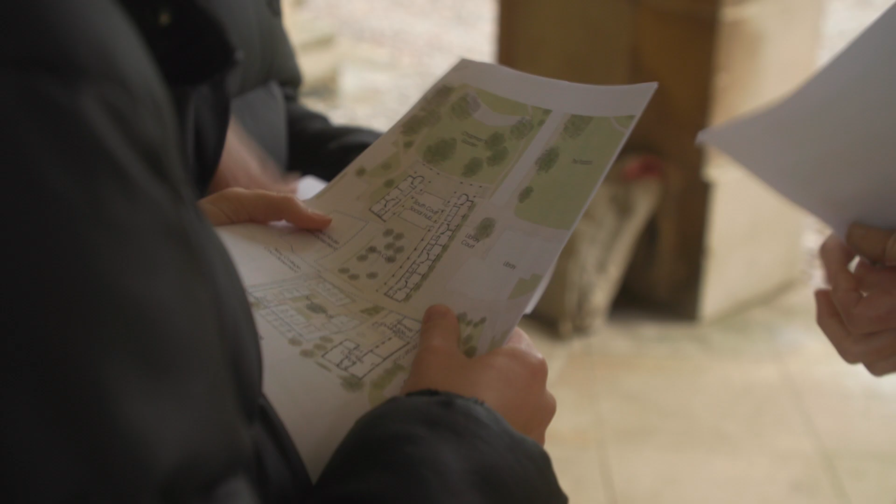First and foremost, the new development is really about people and about the community that exists here, and the way the spaces and buildings support that community.

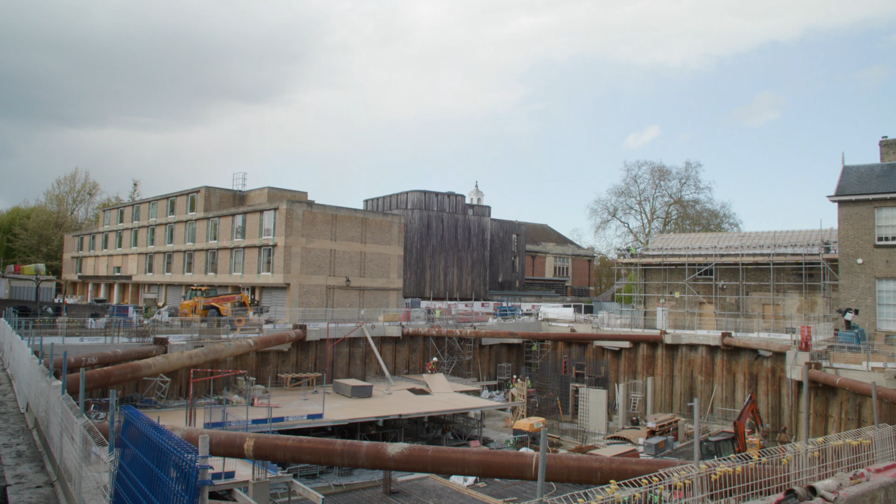We've been planning for the project for the best part of a decade, and we see it as a once-in-a-generation opportunity to encourage the different parts of the community to meet and interact. It's about interaction, sociability, and the life of the college and the way that supports the intellectual life here.

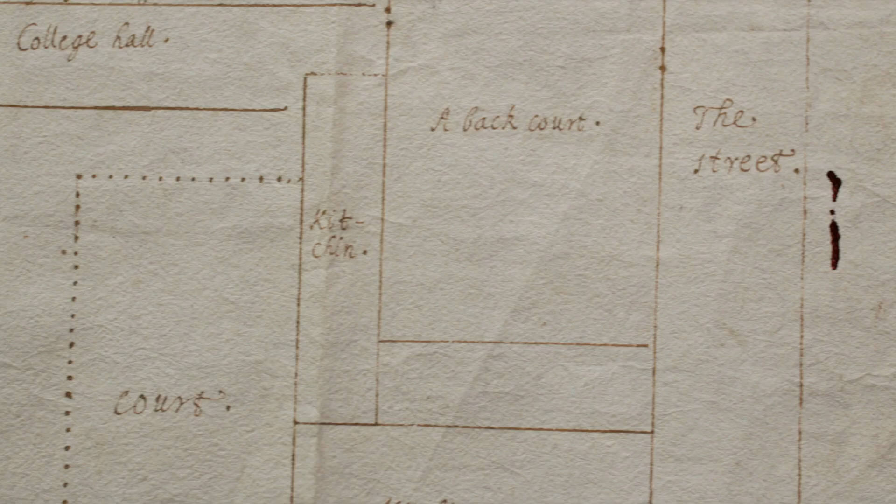The college has been here for over 400 years, and before that there was a priory. So we're very much aware of the new development as another layer in this progressive transformation of the site.

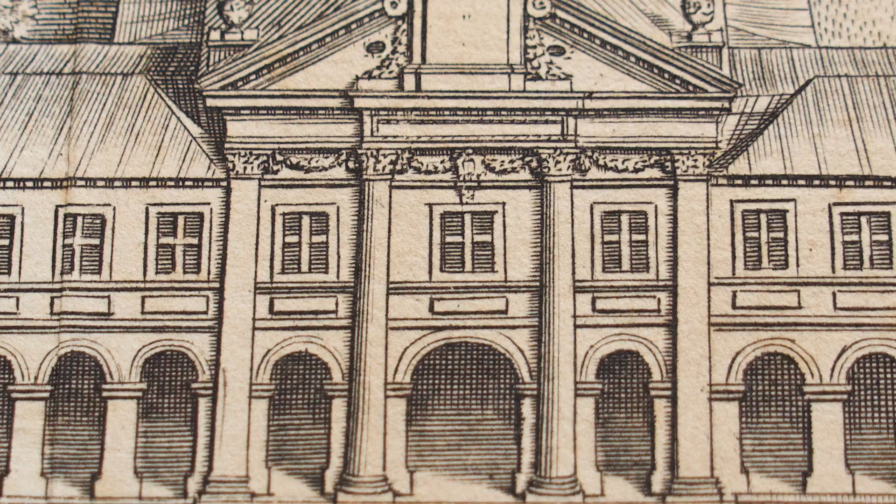Respecting the character of what's here and how that's evolved over time, we spent a lot of time understanding the character of the existing college spaces and the way they're interconnected. There's a unique sequence of informal and formal courts and gardens, so what we've been doing is looking at how the new scheme can knit into that existing network of spaces and routes.

We're looking at the proportions of existing buildings, the materials, the touch and feel of what they're made of, and the craftsmanship of the materials.

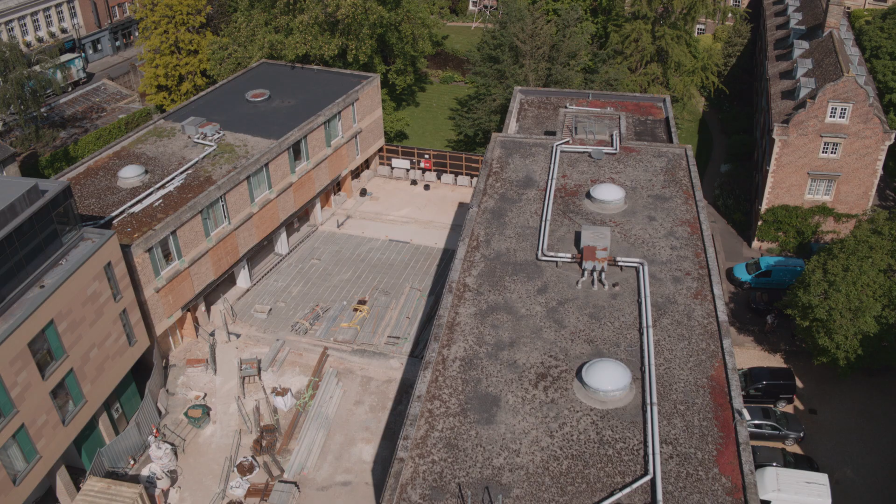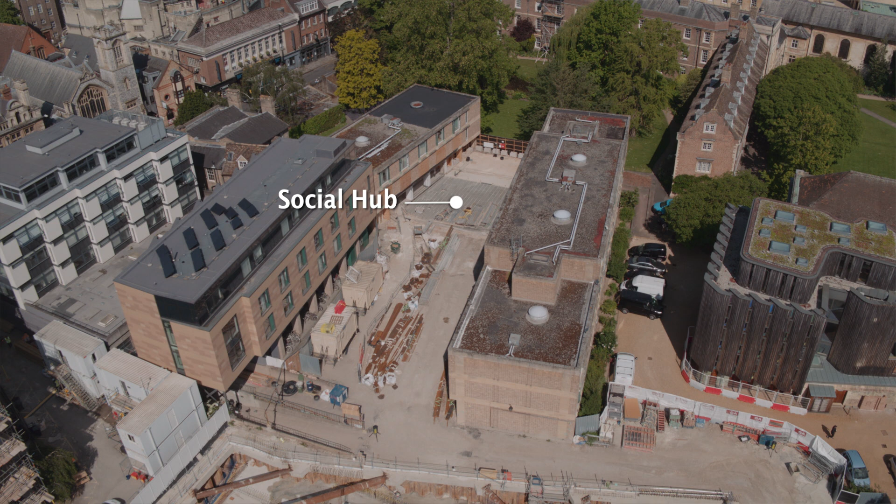The new development embraces the whole area from South Court through to Park Terrace and includes a new social hub, which is a cafe-type environment, and a new college court at the heart of the development, which provides 50 new ensuite rooms for students and fellow accommodation.

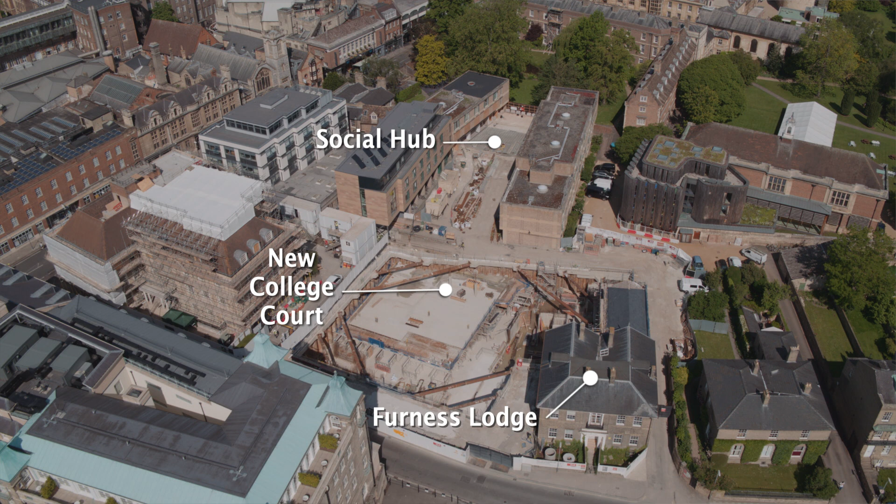Then, on the Park Terrace frontage is Furness Lodge, the 19th century villa. That has a new MCR, new teaching spaces and seminar spaces, and behind that will be the new college bar and event space, so new social facilities.

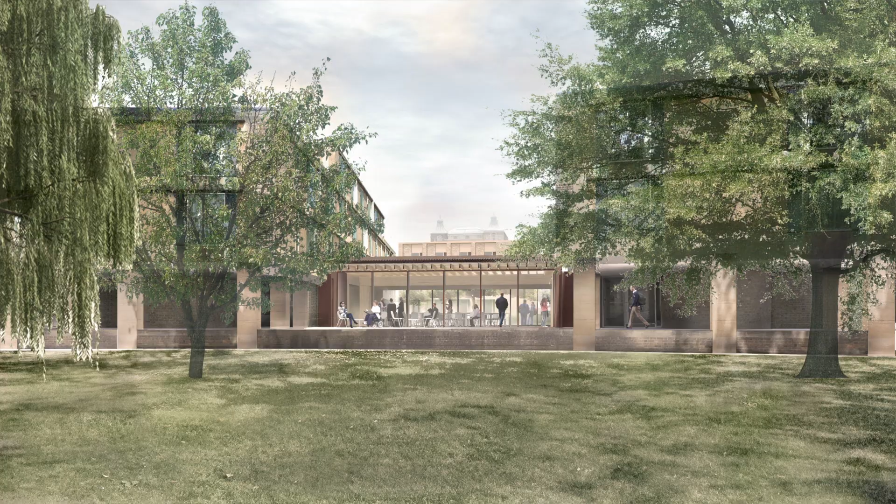Moving from Front Court through to Chapman's Gardens, the first thing you'll see is the new social hub, which sits in South Court in the location which used to be the college bar.

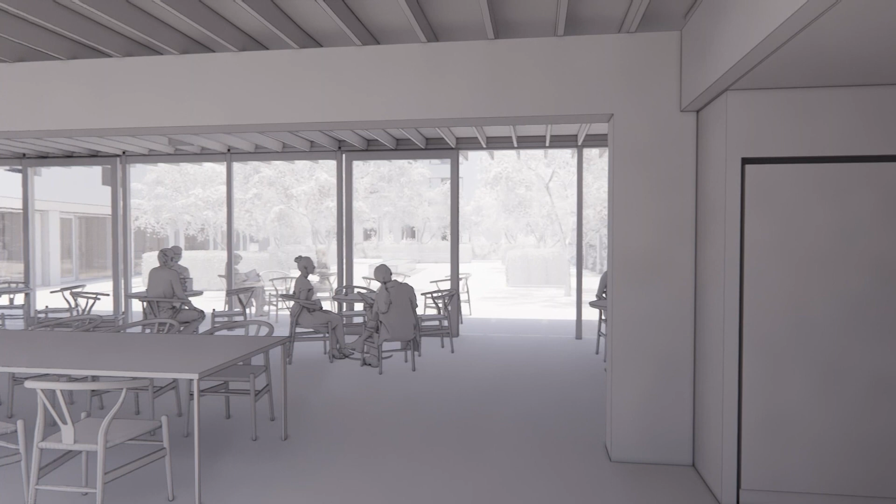The hub will be a beautiful, light, open area, a space for people to do informal study or to have supervisions or to meet friends. We've never had a space where people can mix throughout the day. We've lacked that sort of flexible, non-hierarchical space, and particularly a space that postdocs and researchers can use, because they're part of the community we haven't been able to offer much to in the past.

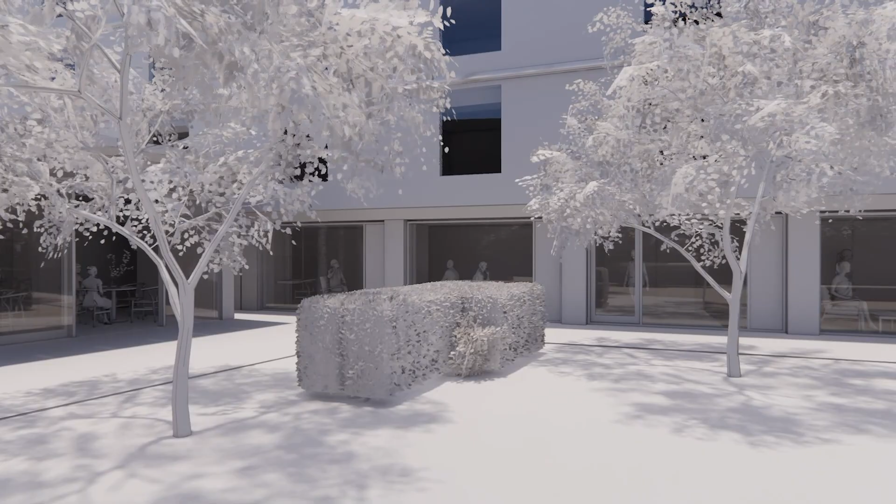The new social hub is going to be fully glazed to Chapman's Gardens and the new landscape in South Court. We're planting pleached plane trees, which create a canopy and a sense of quite intimate scale to that space, and there'll be a reflecting pool of water.

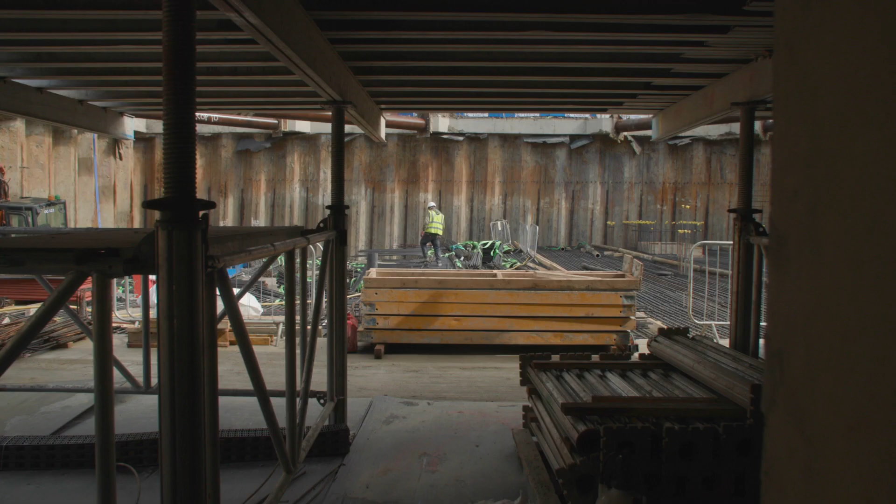We started work on site in November last year, so we've been on site now for about 6 months, and following the exam period this year you'll see a lot more progress as the buildings move forward.

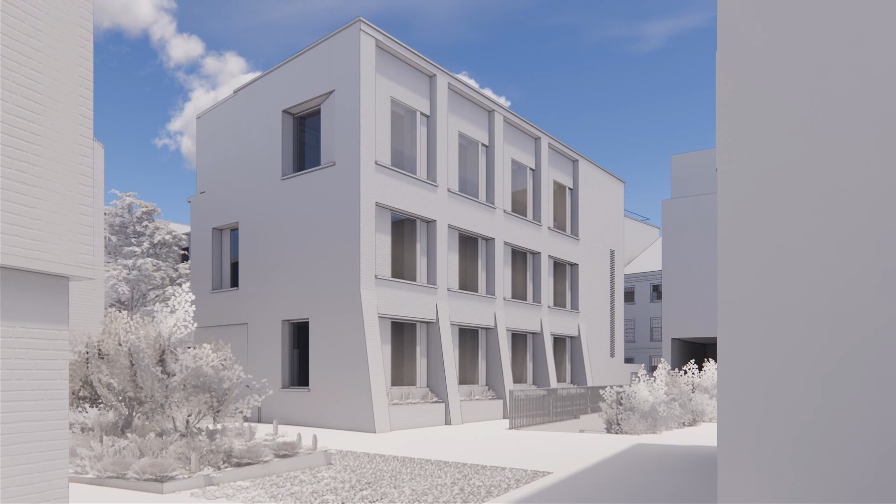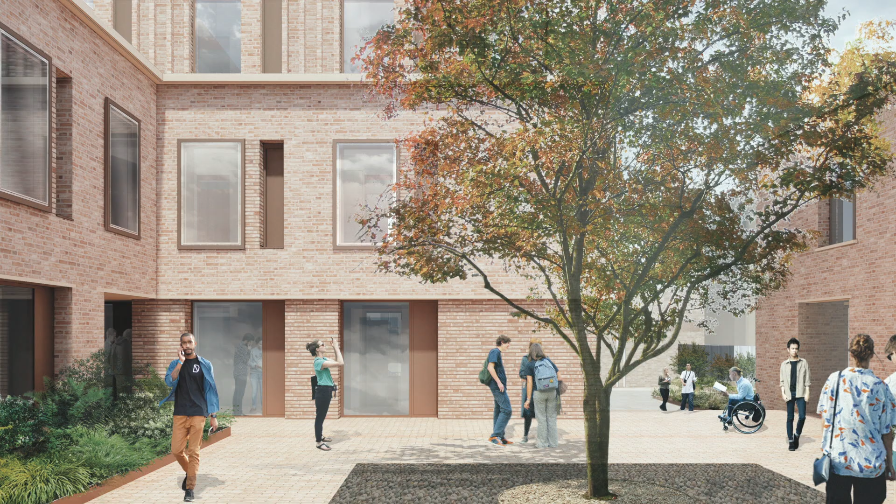The main residential part of the site is based around a new college court, and there are a series of 50 new ensuite rooms with also new accessible rooms, which is very important for the college, and a new accessible fellows suite, and all of those are designed around staircases in the traditional way with their own gyp rooms.

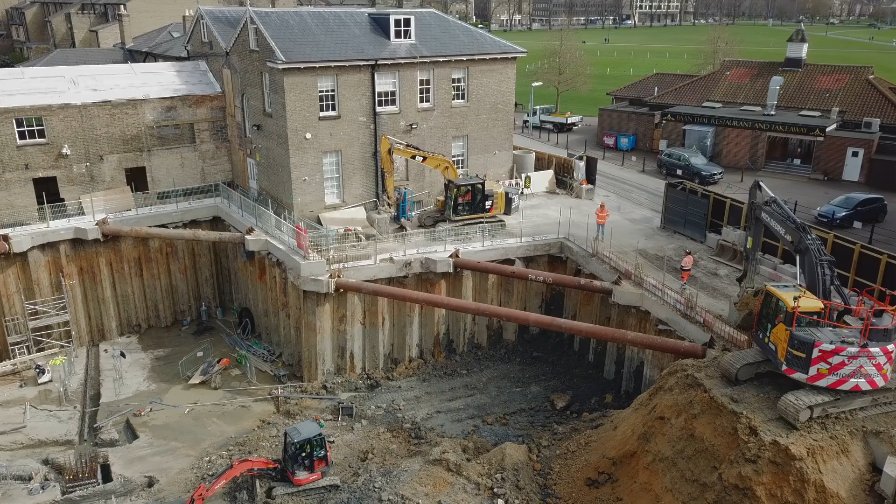The front of Furness Lodge will provide a new MCR. It will be a more flexible space, giving the graduate community new facilities. There will also be seminar rooms, supervision rooms, and an ECSU office. Front of Furness Lodge will provide us with lots of things we desperately have needed for a long time.

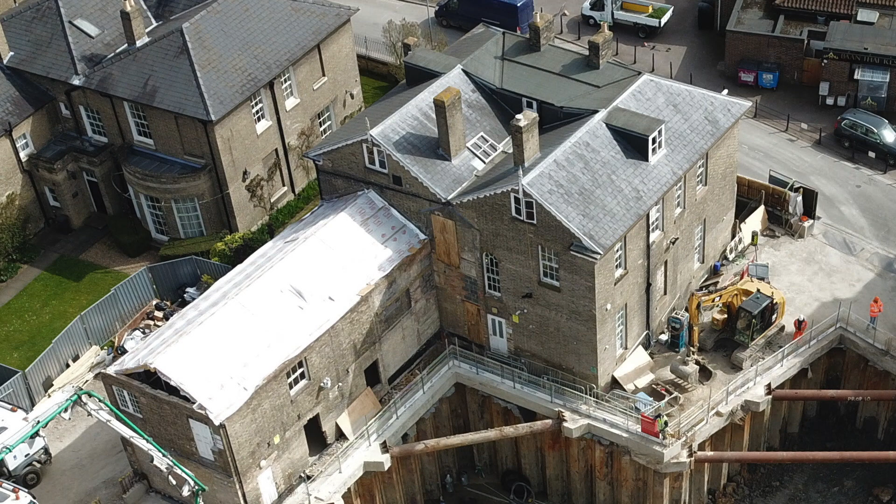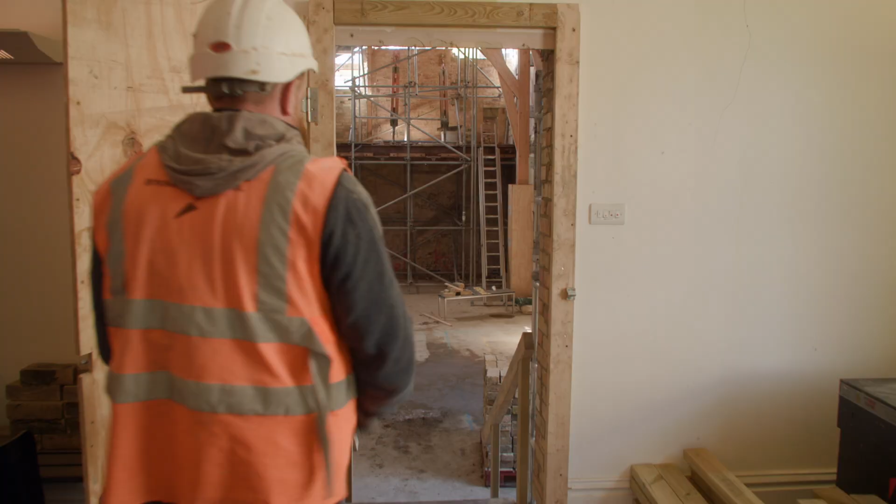And then behind Furness Lodge, in what was the service wing, we're providing a new college bar, which is actually going to be a very characterful space. It's a double height space open to the roof, something of a barn-like volume.

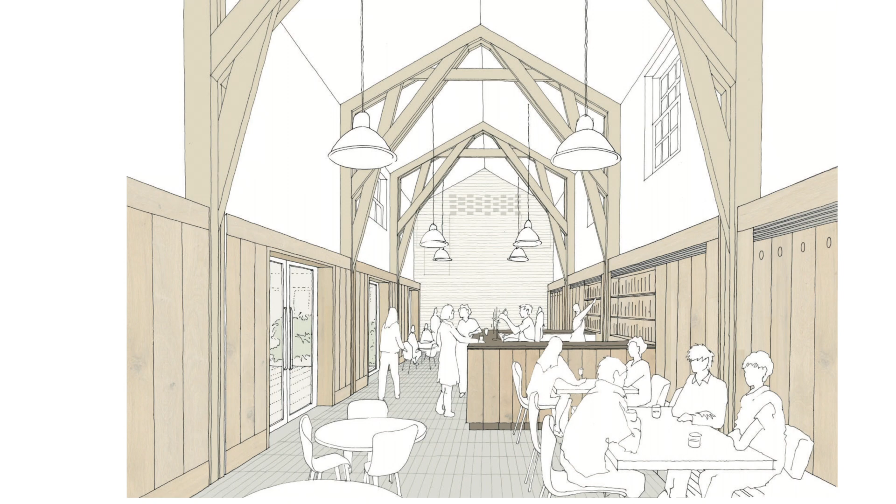Part of a series of social spaces we're creating, which you could imagine a bit more like a traditional pub that has a number of different rooms and bars with different characters. So we have a principal college bar, but we also have a separate lounge bar, and we're creating a large new event space.

Sustainability has been key throughout. We set that as an absolutely core target for the architects, and all of the engineers have worked on the project. It will be a very green development.

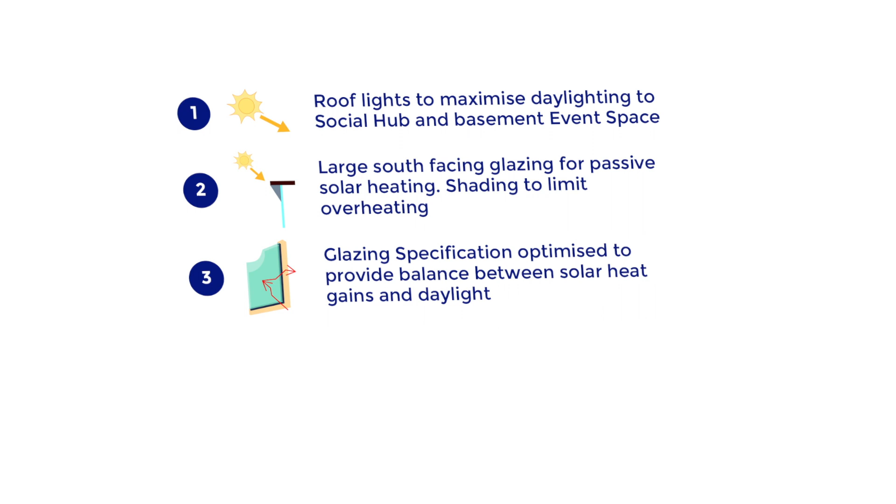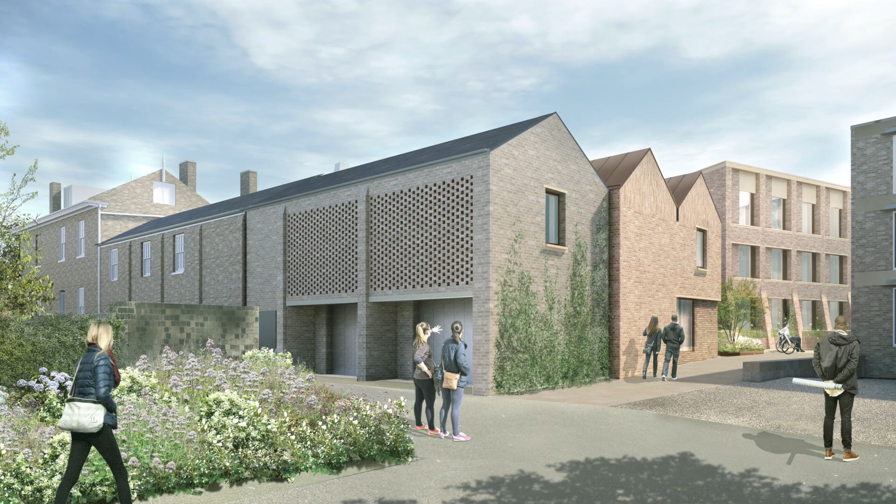The approach here has been very much about reducing the energy that's used within the buildings, and that's by what we call a fabric-first approach. So actually they're very well insulated, we're using the mass of the building to help cool it, and we're thinking very much in the long term about buildings which are here to stay.

It's part of the benefits of being somewhere like Emmanuel, where it's very much all about long-term thinking. A great example of that is the ground source heat pump, which we're told has an expected life of 200 years.

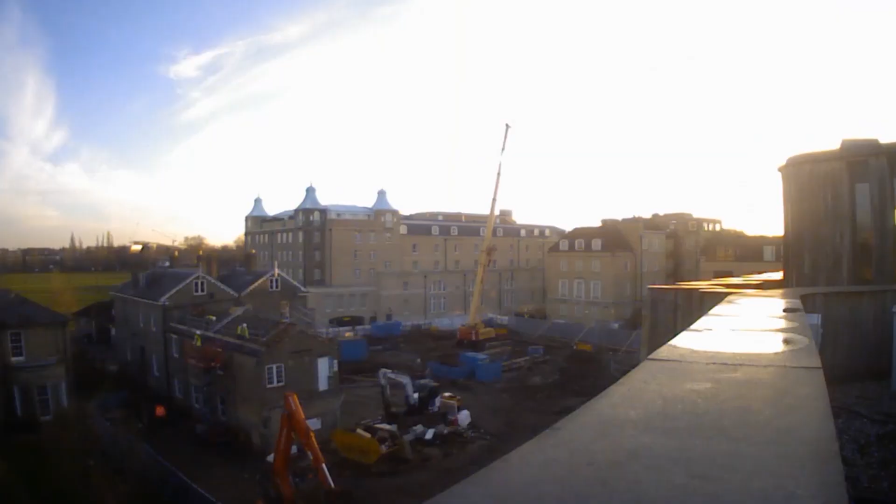It's a transformational project. We're hoping that all of these buildings are going to be here and in use for a very long time, for very many generations, and that we're putting something in place now that the college community will value and use for, I hope, centuries.

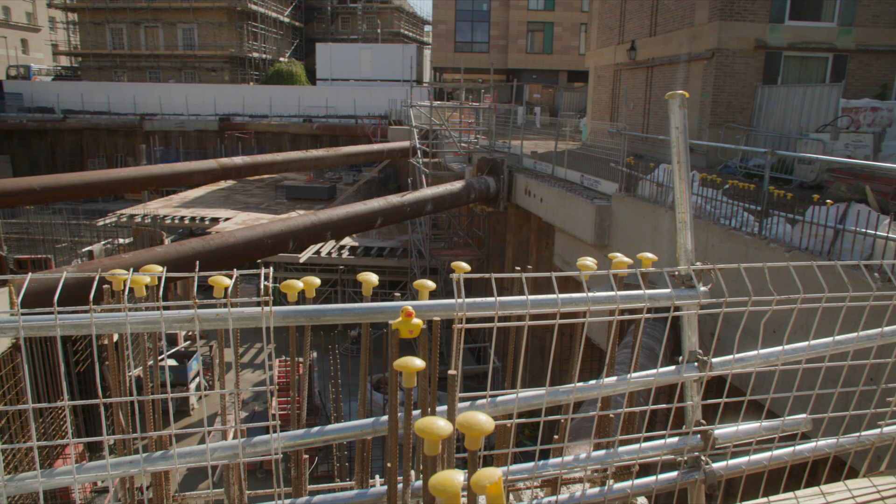Buildings are either constraining or they're enabling. Obviously in good architecture, what you're trying to do is to help individuals, communities, society to live more fulfilling lives. What we're trying to do is create places that delight and are engaging physically and intellectually, and are valued in the long term by the people who form this community.